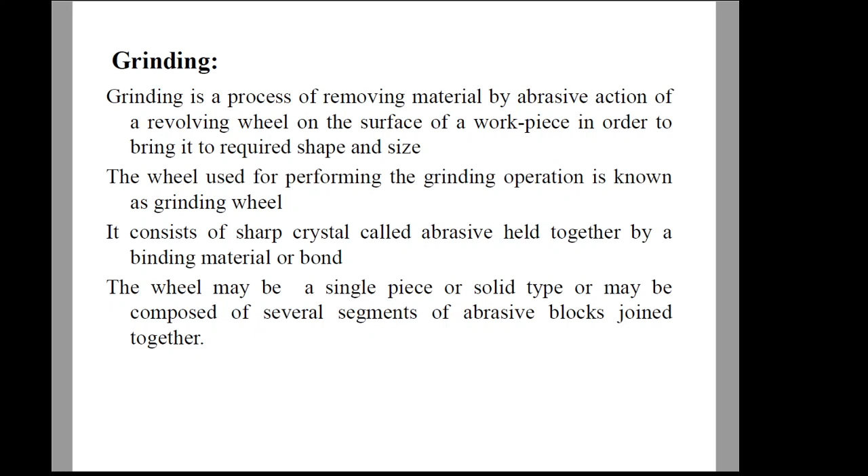Let us discuss in detail about the grinding wheel. Firstly, we shall discuss the materials used for a grinding wheel. It includes abrasives and bonding materials. What is an abrasive? Abrasives are sharp objects present in the grinding wheel whose main function is to cut or remove the workpiece material in the form of microscopic chips. The abrasives perform the cutting operation or abrasion.

Abrasives are mainly of two types: natural abrasives and artificial abrasives. Sandstone, emery, corundum, and diamond are some of the natural abrasive materials. Emery is a combination of crystalline aluminum oxide and iron oxide, and similarly corundum. Sandstone is used only for light duty grinding operations, such as grinding on woodworking, and is suitable only for carpentry works.

Diamond is widely used as the abrasive for hard materials. Diamond is so hard that it is used for dressing of the grinding wheel. We shall discuss in detail about grinding wheel dressing in the subsequent sections.

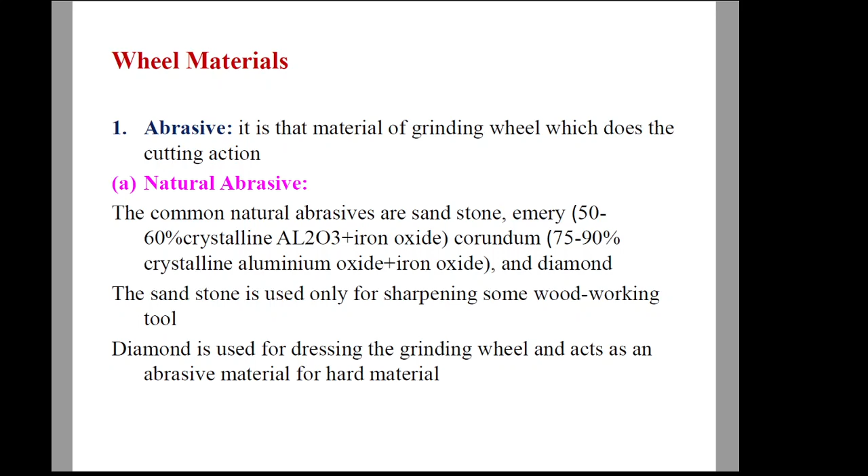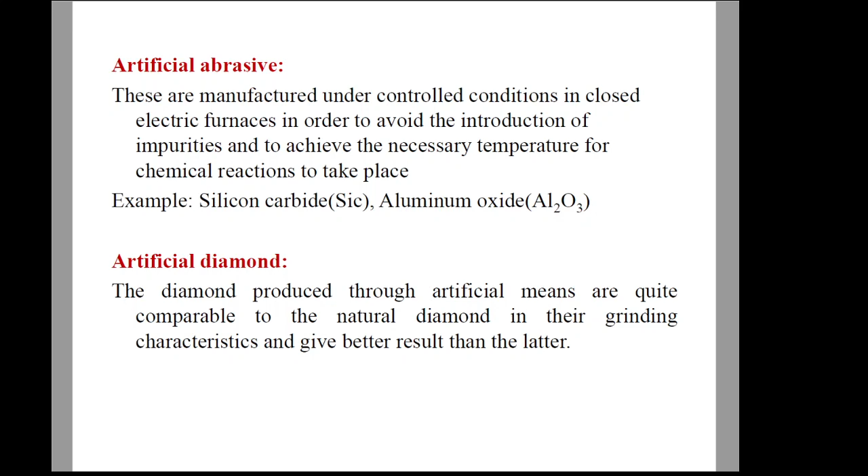Artificial abrasives are manufactured in laboratories under controlled environmental conditions inside an electric furnace in order to provide the required chemical reaction to obtain better bonding in the grinding wheel. Some examples are silicon carbide, aluminum oxide, etc. These are man-made abrasive particles. Even artificial diamond is produced, which gives similar performance to natural diamond.

Nowadays, more research is conducted on artificial abrasive materials, and their use is more advantageous than natural abrasive materials. Since artificial abrasives are manufactured in controlled conditions inside an electric furnace, this enables more uniformity in the product. Similarly, the quality of production and supply can be varied according to demand for the abrasive material. It also reduces dependence on natural resources.

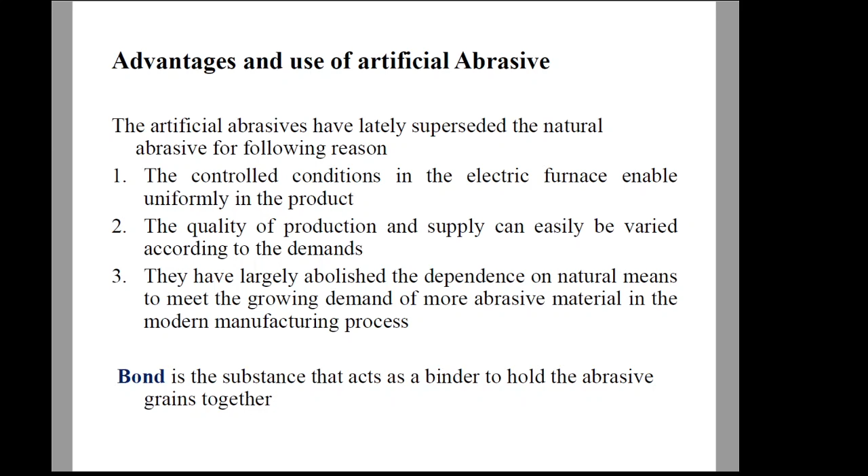Next is the bond material. What is a bond material? It is a substance that acts as a binder to hold the abrasive grains or abrasive materials together, giving the particular shape for the grinding wheel. There are several types of bonding materials available.

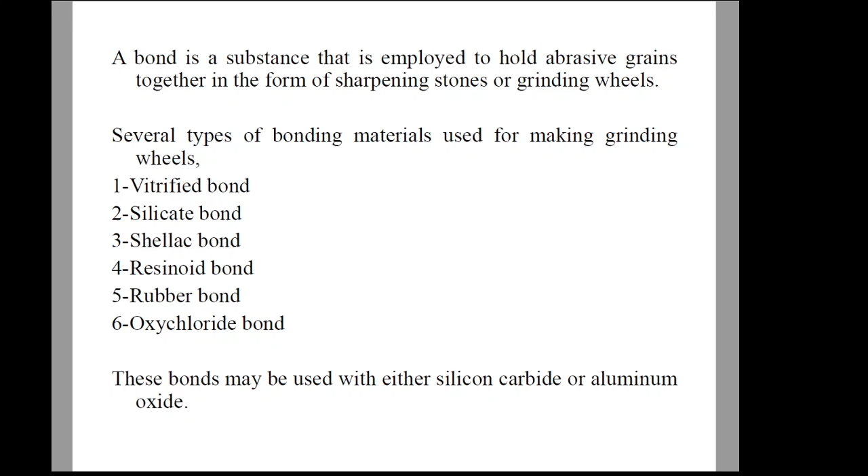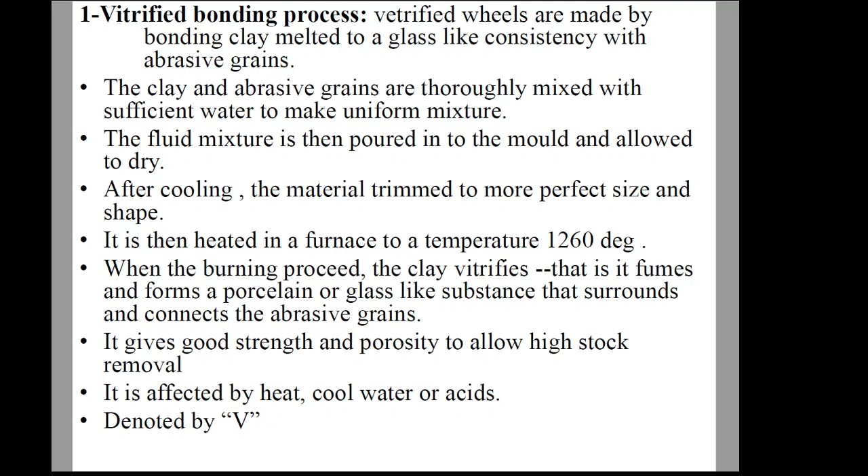Vitrified bonds are made by melting clay along with abrasive grains. Vitrified bonds have great strength and porosity, and they have a high material removal rate. They are usually denoted by the letter V. However, they are affected by cool water, acids, heat, etc.

Silicate bonding is usually denoted by the letter S, and these wheels are waterproof. They are made by mixing abrasive grains with silicate of soda or water glass.

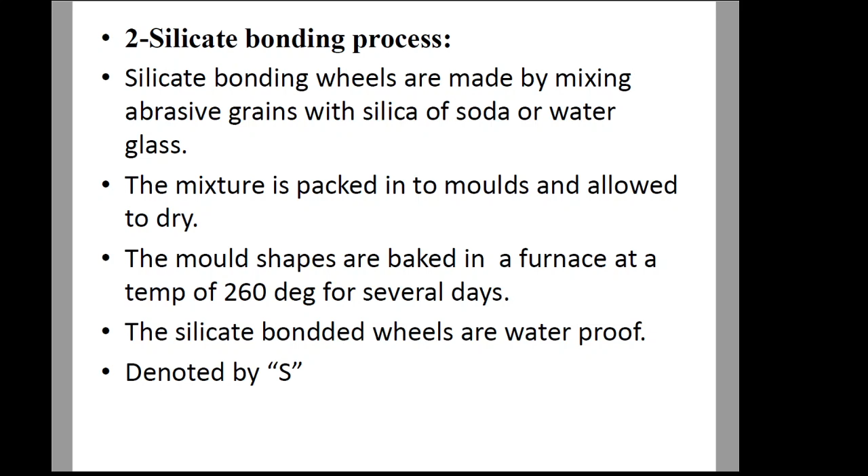Shellac bonded wheels are made by mixing abrasive and shellac in hot containers, and then they are hot pressed. Shellac bond is usually denoted by the letter E because they are elastic bonded. These wheels have a good amount of elasticity and considerable strength. However, they can be used only for light duty operations such as finishing of chilled cast iron, steel rolls, etc.

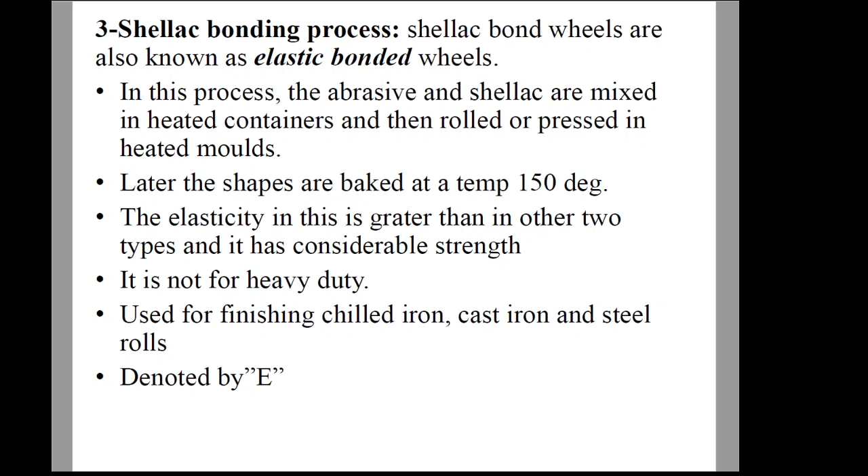Resinoid bonds are made by using synthetic resins, mixing abrasive grains with synthetic resins and other compounds. Resinoid bonds are usually represented by the letter B, and these wheels are used where high speed is required.

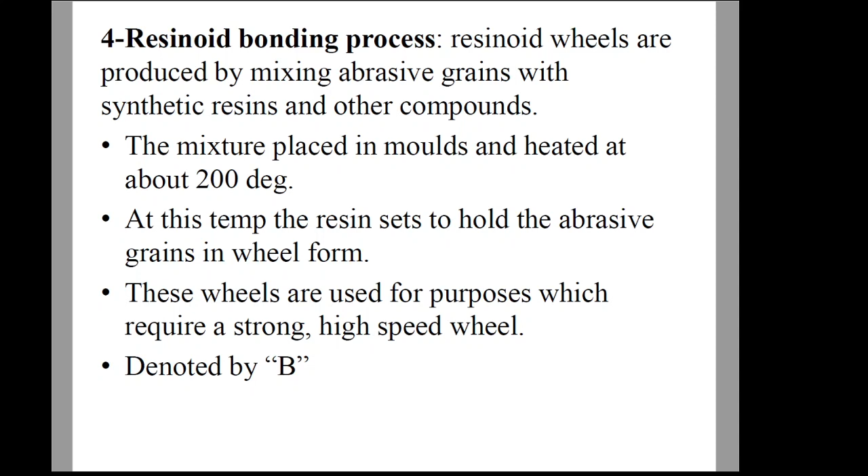Rubber bonded wheels are produced by mixing abrasive grains with pure rubber and sulfur. Rubber bonded grinding materials are available in the form of sheets as well as wheels. Rubber bond is usually represented by the letter R. However, rubber bonds are less heat resistant, but they are denser than resinoid wheels.

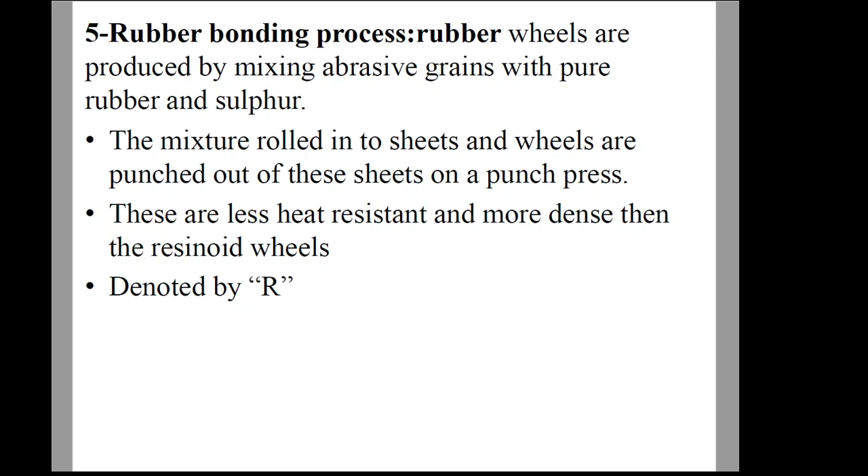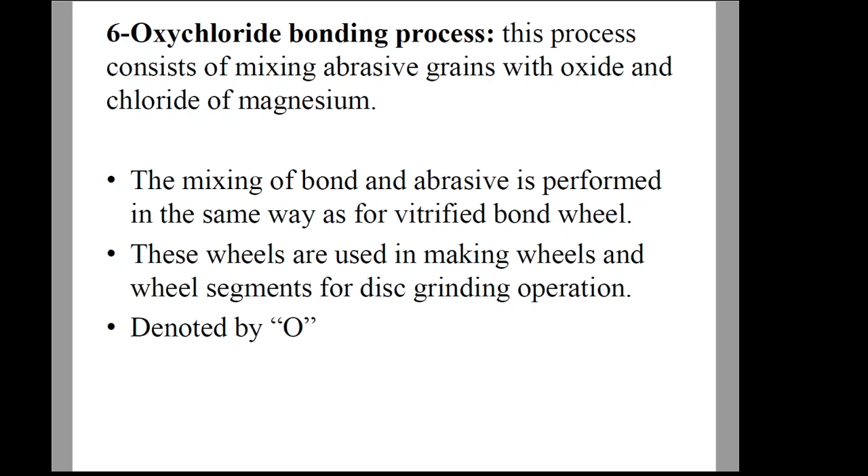Oxychloride bonds are made by mixing abrasive grains with oxides and chlorides of magnesium. Oxychloride bond is usually represented by the letter O.

Next is the grit size or grain size of abrasives in a grinding wheel. If the grit size or grain size is small, then better surface finish can be obtained in the workpiece because very microscopically small chips are removed during the grinding operation. For better material removal rate or for large amounts of material removal, you can use abrasives with large grit size or grain size.

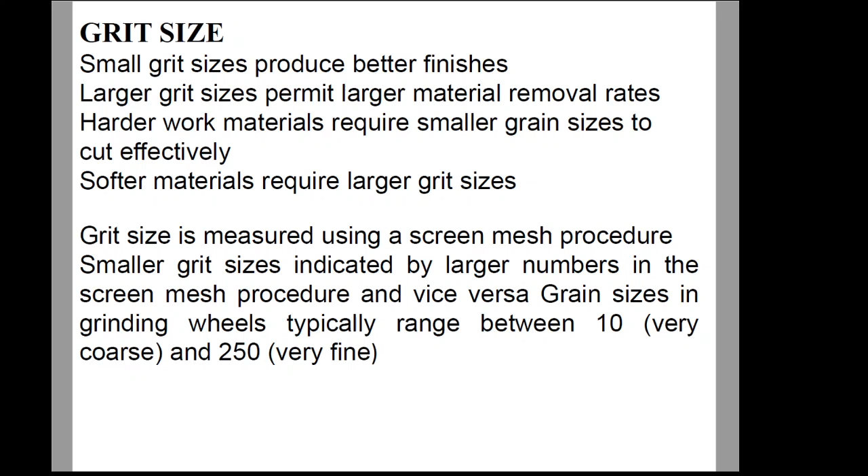Usually for softer materials, we use large grit size, and for harder materials, we use small grit size because that will give effective cutting. The grit size or grain size of the abrasives is measured using the screen mesh procedure. If the grain size or grit size is small, it is represented by large numbers. Usually, the grit size varies between 10 and 250 — 10 for very coarse or large grit size, and 250 for very fine or small grit size.

The grade of a grinding wheel is the measure of its bond strength or hardness of the bonded abrasive. Grinding wheels are available in various grades such as hard wheel, medium wheel, and soft wheel. A hard wheel is stronger, and a large amount of bonding material is present between the abrasive grains.

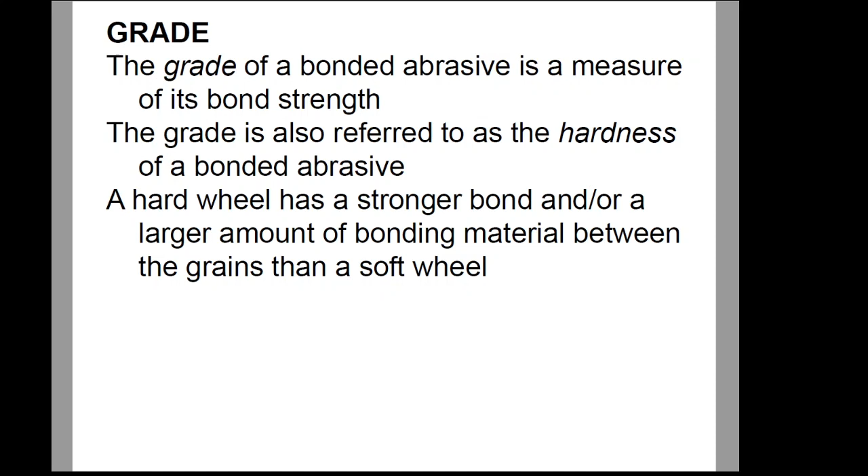The structure of a grinding wheel is the measure of porosity between the bonded abrasives. As shown in this figure, you can identify the abrasive grains held together by the bonding material, with pores or air gaps in between. As the amount of bond material increases, the size of the pores decreases. If the porosity is less, we call it a dense structure. If the porosity is more, we call it an open structure.

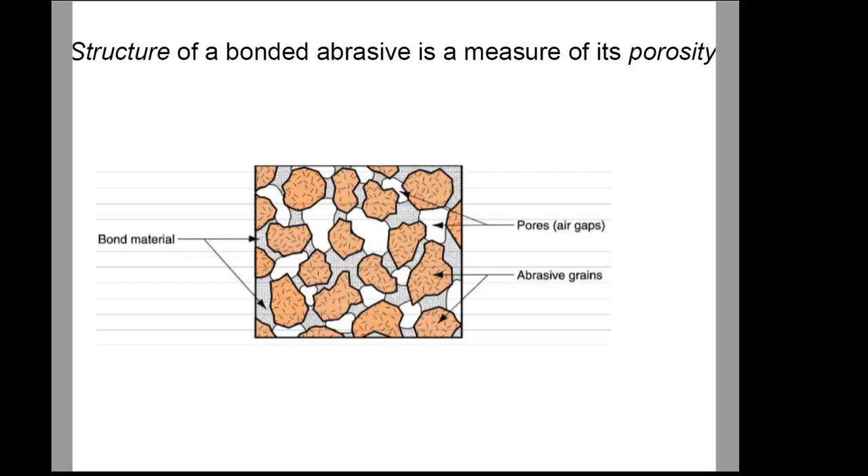Let us discuss how we can specify the characteristics of a grinding wheel, or the grinding wheel designation. The Bureau of Indian Standards, or BIS, has proposed a standard system of designation for grinding wheels, to maintain uniformity throughout the country. The various characteristics of a grinding wheel are represented in the following sequence: first the abrasive material, then the grain size, followed by grade, structure, and lastly the bonding material.

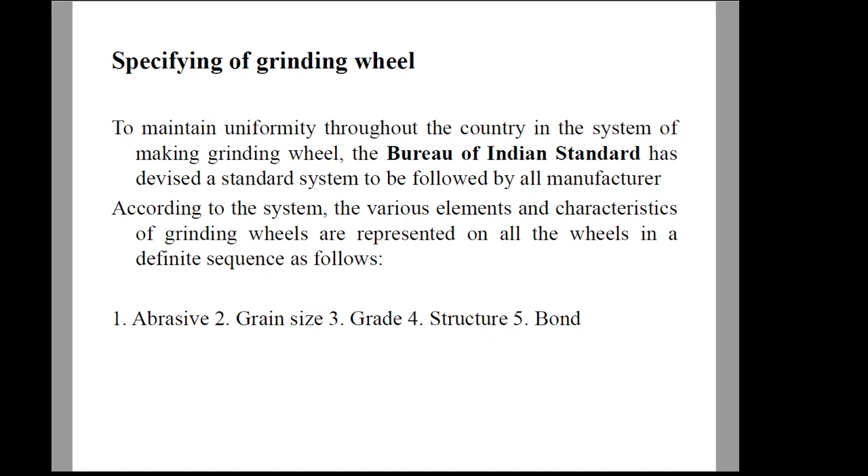Let us discuss the following specification of a grinding wheel. Here the grinding wheel specification is given as 125 x 25 x 32, WA46, L4, V, 17. Here 125 stands for wheel diameter, it has 25 mm thickness, and there is a bore diameter of 32 mm. Sometimes there will be an optional prefix given by the manufacturer. WA represents the abrasive — abrasive is aluminum oxide, and grain size is given as 46.

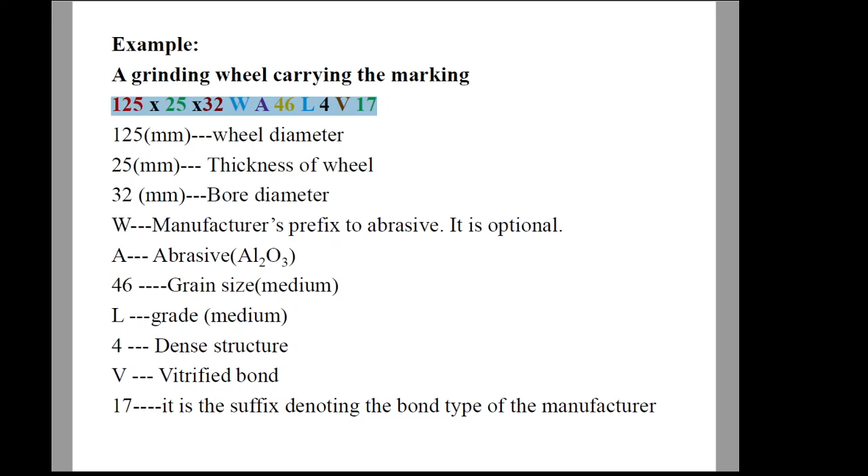46 is a medium grain size, and the grade is also medium, represented by L. The wheel has a dense structure with designation 4, and it possesses vitrified bonding. The suffix 17 is also information given by the manufacturer.

Let us discuss another designation, given as 51A36, L5, V, 23. 51 is the prefix given by the manufacturer, usually optional, and it indicates the exact kind of abrasive used in the grinding wheel. For representing the abrasive, there are two letters, A and C — A stands for aluminum oxide and C stands for silicon carbide.

Next, 36 is the abrasive grain size. 36 comes under the category of medium grain size or medium grit size. There are also coarse grit size, fine grit size, and very fine grit size.

Next is the grade of the grinding wheel. L stands for medium grade. There are also soft grade and hard grade. Soft grade is usually represented by alphabets starting from A, and hard grade is usually represented by the alphabets V, W, X, Y, Z, etc.

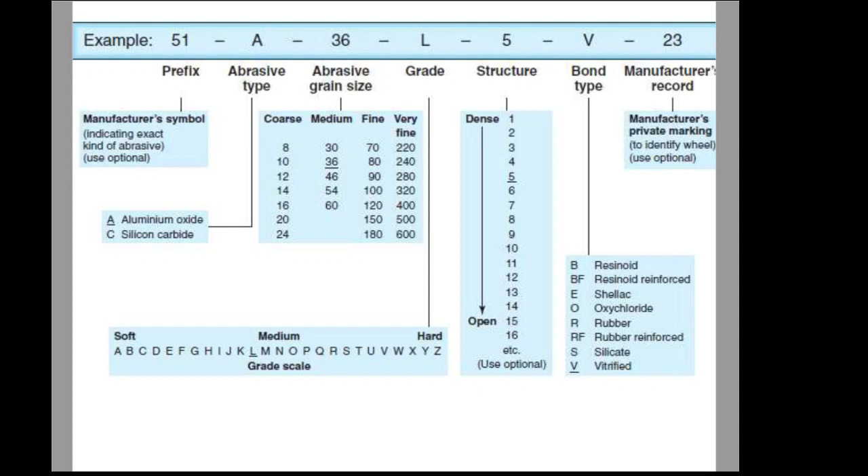Next is the structure of the grinding wheel. If the grinding wheel has a dense structure, it is usually denoted starting from 1, and from 15, 16, etc. it will have an open structure. Then comes the bond type of the grinding wheel — various letters are used for different types of bonds such as resinoid reinforced, shellac bonding, oxychloride bonding, rubber, vitrified, silicate, etc. And 23 is also a manufacturer's suffix, providing some information from the manufacturer, and it is also optional.

For more details, you can refer to this slide also. One more example is given here for your reference.